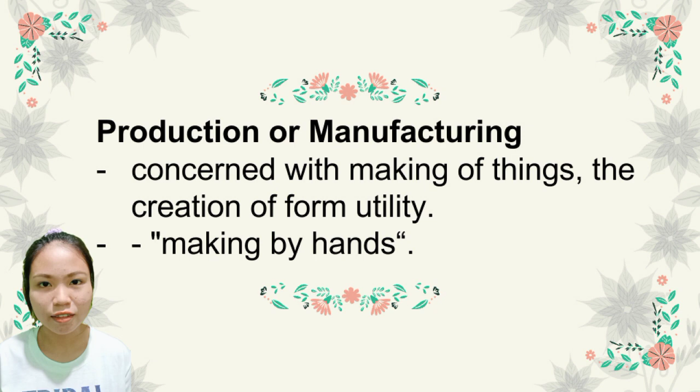Types of production process: Extractive process. In some industries, the basic production process is one of extracting substances from the earth or the sea, known as the extractive process. Examples include the mining of coal, iron ore, lead, gold, and silver, drilling for petroleum, and the extraction of magnesium and other chemicals from the ocean.

Analytic process. The analytic process is one in which a basic substance is broken down into a number of other materials which may or may not bear any resemblance to the parent substance.

Synthetic process. This refers to industries in which a number of different materials are combined to form a single product. In the manufacture of steel, glass, and dinnerware, the final products are quite different from the original ingredients because of physical or chemical changes.

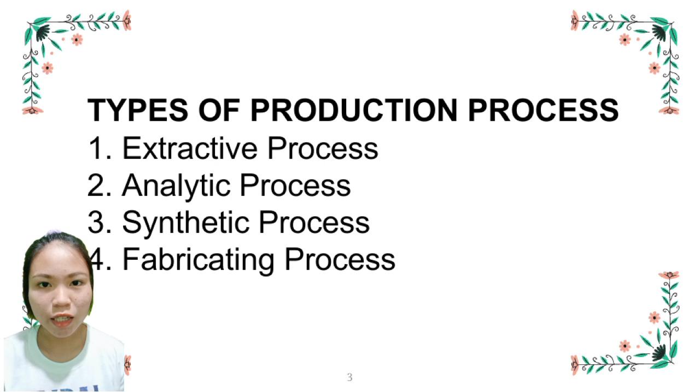Fabricating process. Although used principally in the structural steel business, this term refers to a process that is rather widespread in industry, wherein a material has its form changed to some extent by being machined, woven, cut up, pressed, finished, or treated in some other manner. It is sometimes called the converting process, particularly in the textile field.

Continuous and intermittent processes. A second classification of production process includes the continuous process. Unfortunately, the term has a dual meaning that is frequently confusing. It is sometimes used to describe a manufacturing situation in which the productive facilities must be kept continuously in operation for relatively long periods of time, necessitating day and night shifts and Sunday work. In the steel industry, for example, the furnaces must be kept hot once they have been lit until a shutdown is caused by a mechanical failure or a lack of orders.

If the furnaces are allowed to cool, they must usually be rebuilt before they can be used again. This situation is also true in much of the chemical industry, where once the production processes have been started, they must be carried through to completion without interruption.

Intermittent process. Here again, as with its counterpart, there is a double meaning to intermittent process. In its first sense, the term refers to any manufacturing process that can be stopped at will, for example at the end of each day, and that can be started up again the next morning with no difficulty. Under this concept, almost any industry that operates on a purely one-shift-a-day basis would qualify.

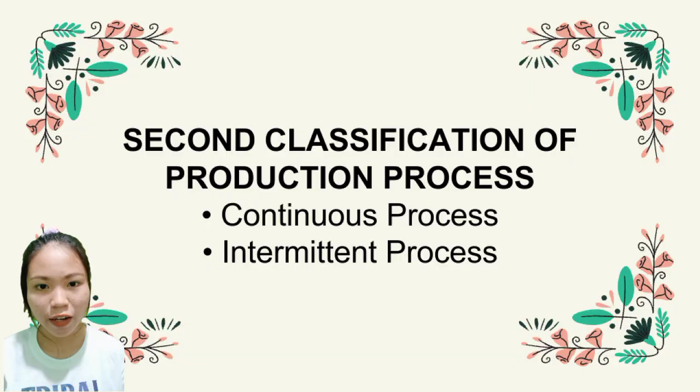Increasing production. Four processes in production have been used to good advantage in marketing, transportation, office management, and other business functions. It is in manufacturing, however, where they find the greatest application and are mainly responsible for the progress of industrialization in advanced countries. These processes are specialization, standardization, simplification, and mechanization.

Specialization refers to the narrowing of the field of activity. A company may specialize in products. Instead of putting out a variety of radio-electronic products, a company may specialize in only a few kinds of transistor radios, which it would then develop to a high degree of quality and perfection. Specialization may be applied to process, equipment, or labor skills.

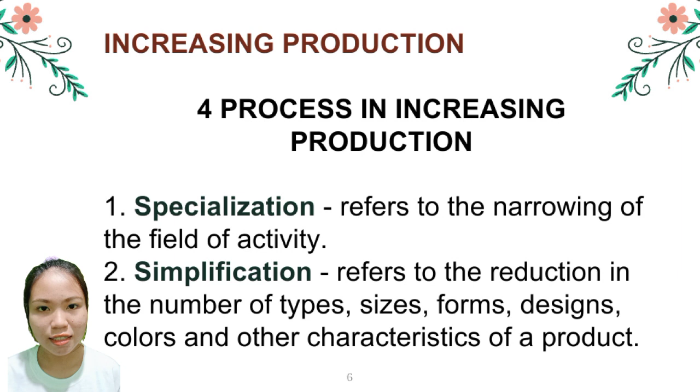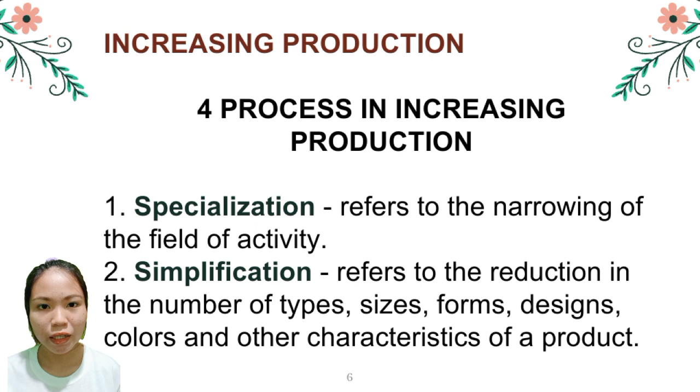Simplification refers to the reduction in the number of types, sizes, forms, designs, colors, and other characteristics of a product. When a manufacturer of clothing reduces its products to three basic sizes of small, medium, and large, it engages in simplification. If instead of putting out shirts of numerous designs and interlocking colors, it puts out only a few basic and plain colors, it uses simplification to reduce inventories of raw materials, to effect economies and lower cost of manufacturing, and to increase efficiency of the manufacturing process.

Standardization refers to the setting of standards or norms as to the size, quality, form, measure, weight, or other similar feature. For instance, electric light bulbs are generally standardized such that a bulb purchased anywhere can fit a socket in any home. Automobile or Jeep parts are standardized by manufacturers to enable mass production and easier repairs. Standardization enables interchange of parts.

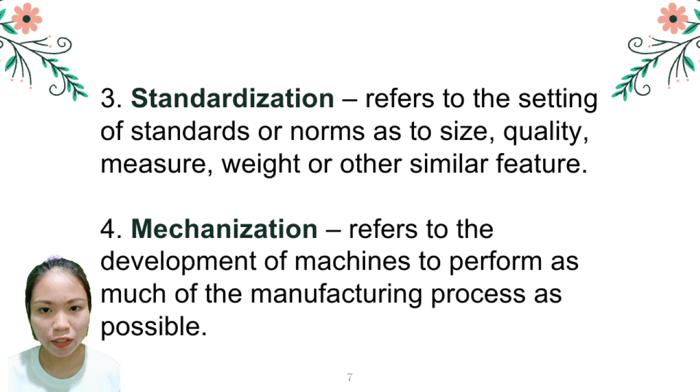Mechanization refers to the development of machines to perform as much of the manufacturing process as possible. Manual skills of workers are supplanted by machine skills. A mechanized printing establishment may use a folding and binding machine to take the place of the work of 20 laborers in the end processes of preparing books.

Factors involved in the manufacturing. Design. The design may be standard, static, and unchanging, as in some articles of staple merchandise. It may be variable and subject to change overnight, as in the case of some lines of style merchandise, or the change may be imperceptibly effected over a fairly longer period of time.

Requirement of design. The design of an article must meet four requirements. Consumer acceptance. The design of the article must have what is called consumer acceptance. The article must appeal to the consumer's taste or desires. Utility. The second requirement of design is that the product shall adequately serve the purpose for which it is intended. The product must be useful.

A beautifully designed and attractive chair may not be strong enough to serve as a chair for day-to-day use. Not too many families can afford purely decorative furniture, especially if there are many children. Utility in an article is indeed an imperative consideration in design. Consumer desire for beauty should be harmonized with utility.

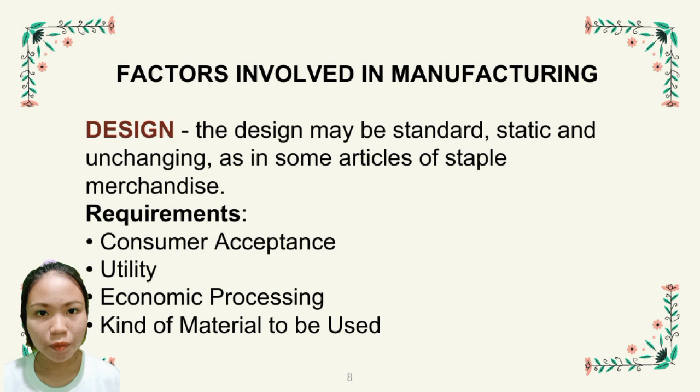Economic processing. As a third requirement, the design of an article should not be a cause against the use of an economical manufacturing process. If the design slows down the process of manufacturing, high cost of production will result. Kind of material to be used. The fourth requirement of design is that it must suit the material of which the article is to be made. The material must be worked to produce the design wanted. Some materials are more workable than others. Some processes can be used with some materials and not with others.

Choice of materials. As a second factor in manufacturing, the choice of material, among other things, depends on utility or purpose, durability, and cost of development and manufacture of the product. Utility. Articles may have either a utility purpose or a decorative one, sometimes both. An ornament has little utility. If it is merely for decorating something like a house, such decorative articles carry temporary consideration. The main considerations in such cases are cheapness of materials and inexpensive methods of manufacturing.

Durability. Articles with utility purpose are made with some consideration for durability. The choice of durable material is desirable. At the same time, economical manufacturing is also desirable in order to keep costs down.

Cost of development and manufacturing. Before undertaking to develop a particular product, the management must be able to envisage a return on the product that is commensurate with the cost of development. It goes without saying that this requires not only forecast of the market for the product, but also the knowledge of time, effort, and equipment required in its development. Also important is the estimated cost of manufacturing the product, which must be done economically, otherwise the product will be of little use.

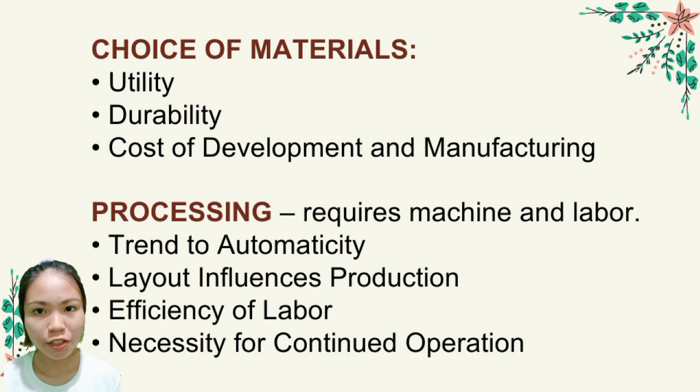Necessity for continued operation. With effective machines and equipment, and with efficient employees and workers, the manufacturer should realize that his remaining successful in business depends upon his ability to continue to produce what is needed in the market at a price that the customers are willing to pay. Cost of materials and labor affect the price; equally so will idleness. The overhead cost of an expensive machine must be considered. The manufacturer, therefore, must try to keep his machines and men in operation. This involves careful scheduling of operations, orders, and materials. Control of production. In the broadest sense, control of production signifies the management of manufacturing.

Primarily, it is concerned with the aspects of time, place, and quantity. Control of production uses all the information in dictating what is to be made, from what it is to be made, where it is to be made, and how it is to be made. It also furnishes the specifications, instructional details, and paperwork necessary to carry out those plans.

It gives data to the manufacturing unit and collects reports on performance as a guide for future operations and to check on current performance. Production control facilitates the flow of work, sees to it that the parts are there when they are needed, and enables the company to meet the time schedules. Production control is used as a gauge in tracing waste, loss, and many business failures. It serves as a powerful and profitable mechanism when properly applied.

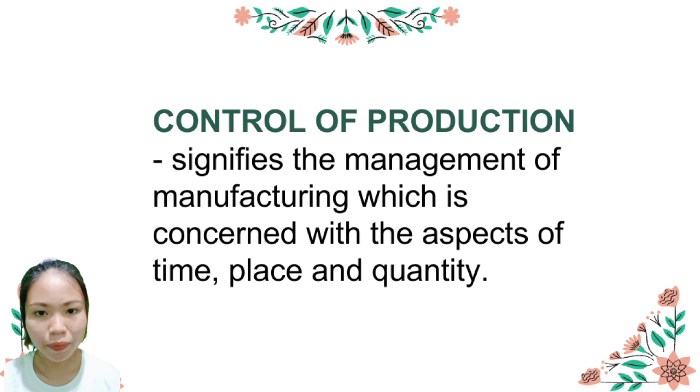Steps in production control. Production control consists of a well-defined set of procedures that has an objective, the coordination of all the elements of production into a smoothly flowing whole, resulting in the fabrication of products with a minimum of interruption at the earliest possible time and the lowest possible cost. The essential production data utilized in production control consist of routing, scheduling, and dispatching.

Routing concerns the establishment of the path which the production will take in its travel through the plant. The route sets forth the operation to be performed and the sequence to be followed. The machine, attachments, and work areas to be utilized at each production step are indicated. Scheduling. It is the assigning of clock or calendar times for carrying out the various operations. It can be thought of as the time use coordinator, which seeks to have many operations properly synchronized.

Inventory control. Closely allied to production control and often part of it is the control of inventories. It avoids unnecessary waste. A failure to have adequate control may result in the scrapping or throwing to salvage of useful items. Inventory control covers raw materials inventories, goods in process inventories, finished stock inventories and supplies inventories. A close check of issuances is made. Accurate records that give a true picture of the status of items are established. Control of inventories not only prevents wastage and minimizes theft, but also facilitates cost accounting of the manufacturing process.

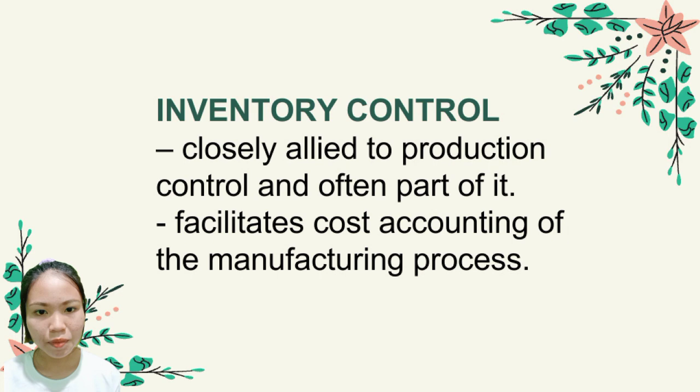Ordering points when economic quantities may be ordered can be set with greater precision. It is also easier to establish the warning point when follow-up of materials which have been ordered must be made. Otherwise, delays and interruption in actual manufacture may result. Effective control of inventory is aimed at ensuring that an adequate but not excessive bank of materials is on hand at all times to meet operating requirements.

Quality control. The manufacturing end of a business is not only responsible for production, for producing quickly at a reasonably low cost, but is likewise responsible for the quality of the product. Quality is controlled by having precise specifications and necessary inspections of the product to see that the specifications are adhered to. The product engineer takes care of designs and specifications of the products of an enterprise. It is a highly specialized phase of designing, particularly in metal working industries.

The product engineer must have a keen understanding of technical requirements and sees to it that the quality is assured not only in the performance but also in the ability of the product to be used without too much repair or servicing. Quality is maintained through inspection. The inspection department does not create quality but measures the quality of products against the standards set by the company. It ascertains what quality should be maintained and conducts its quality check even when volume production is involved.

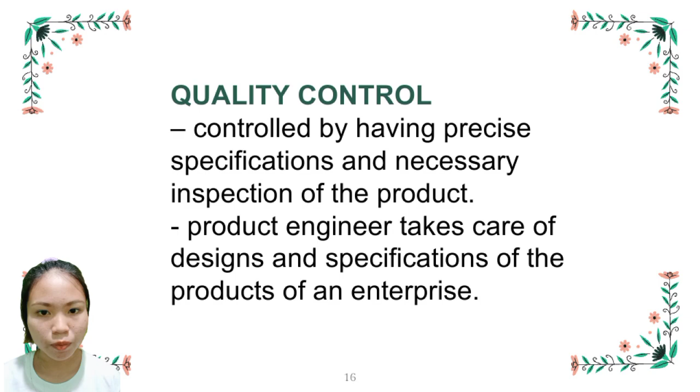Maintenance. Practically every enterprise of any size, hotel, store, school, factory, or utility has its maintenance department. The smooth functioning of the entire operating department is virtually dependent upon the effective operation of the men behind the scenes, the maintenance workers. Adequate maintenance and inspection aid in controlling production machines. Machine maintenance consists of periodic checkups, adjusting alignments, sharpening production tools, lubricating moving machine parts, and examining machines to detect any misuse.

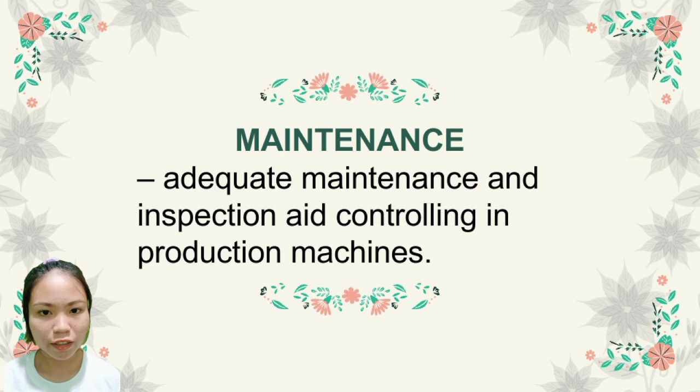Inspection of work done with a particular machine is a common machine control technique. It is effective and perhaps the cardinal test because what's being accomplished by use of the machine is the important consideration and answers whether performance is taking place according to plans. Any necessary corrective measures can thus be ascertained and the proper action taken.

Using raw materials for the production of goods that are valuable in large quantities can be termed as manufacturing, and industries which can create a finished good from raw material can be termed as manufacturing industries. The manufacturing industry falls in the secondary sector, and it plays a crucial role in the economic development of the country, as economic growth is measured by the growth of the manufacturing industries.

The manufacturing sector is regarded as the backbone of both social and economic development. They aid in the modernization of agriculture and the reduction of people's significant reliance on agricultural income by offering jobs in the secondary and tertiary sectors. In today's globalized world, our sector must become more efficient and competitive, with only the best products remaining competitive.